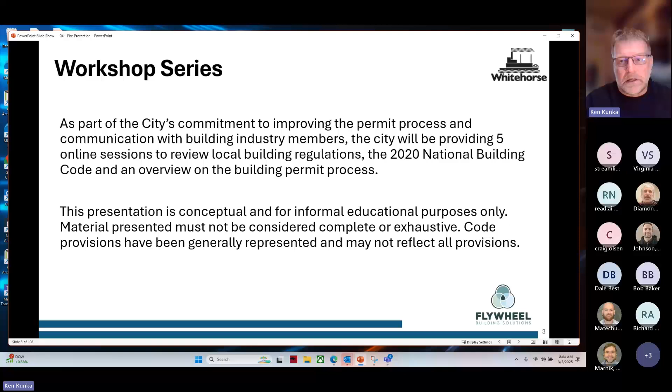The presentation is conceptual. I tried my best to provide some pertinent information to help educate you, especially in this topic of 9.10. There's so much to cover. We could probably do 3 sessions alone in 9.10. But I'm just trying to touch on a few items. And if you do notice an error or have a question, then please let me know, and I can do some more research with the team and follow up with an updated slide deck.

So again, we're on 4 of 5. I'll be covering framing, including the permanent wood foundations, on Friday. And the hope is that these all lead into building out a guide of residential or Part 9 construction. So what needs to be on permit drawings, what type of inspections, trying to give the city's commitment, again, to provide a general outline of the do's and don'ts, so the whole process moves a lot easier.

This session, I'm going to do the best I can to touch on some general overview of 9.10. Again, it's quite large. So we're going to go over the principles of fire, some occupancy classifications, building size, fire separations, and smoke tight barriers. That's really important. The difference with firewalls. We're going to jump into probably a quick session on spatial separations, because again, that can get quite involved in itself, probably its own 90-minute session.

Really wanted to talk about fire blocking, fire department access, and some of the challenges with infill development that every city is facing right now with the increase of demand of low density and some small commercial. And just a quick touch on interior finish, mostly in the cabinets and in the kitchens.

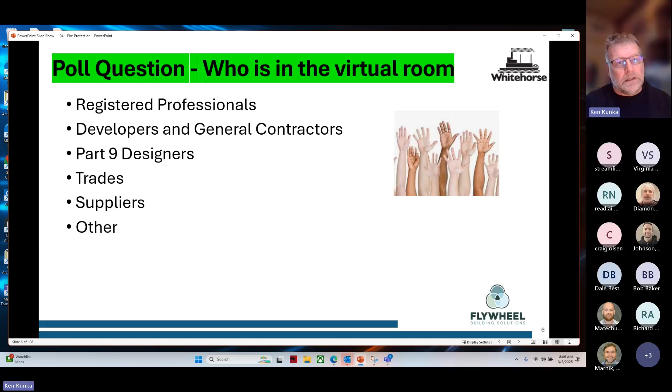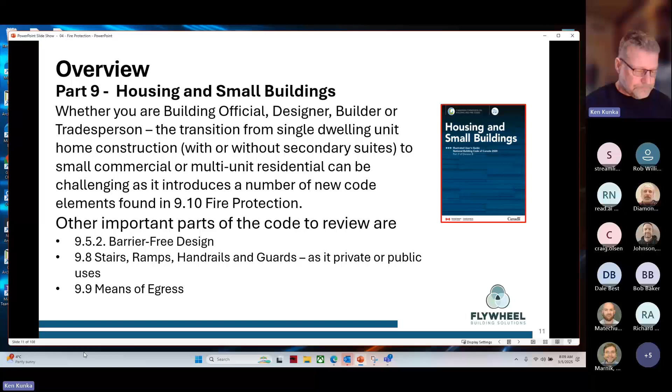Overview of housing and small buildings. So we're looking at the application part in the code, 1.3.3.3. And this is where Part 9 is settled in. So we have Part 9, we have Part 3, and they're based on the size and height of the building, but also some uses. I'd highly recommend that you go into the definition section of the code, especially in this area. If you're in Part 9, doing a commercial tenant alteration or a small townhouse or even a strip mall, this is where you're going to be living.

When you look at an example of the definition, residential occupancy means the use of a building or part thereof by persons for whom sleeping accommodations are provided, but who are not harbored for the purpose of receiving care or treatment and are not involuntarily detained. So those exclude the group care homes and the detention facilities. So we're just dealing with living units that have a sleeping unit, and they normally would also include a cooking facility, but it's not necessarily required by the definition.

So we look at 3 storeys or less and a limited building area. I brought in some specific definitions, because this gets challenging. I know you have the frost protection challenge, so your buildings are probably normally sitting quite a bit into the ground. But at times, on a sloping site, you may start running into difficulties where you're designing a larger multi-unit building, and you want to do 3 storeys and have a basement, and it may have a parking garage on the bottom.

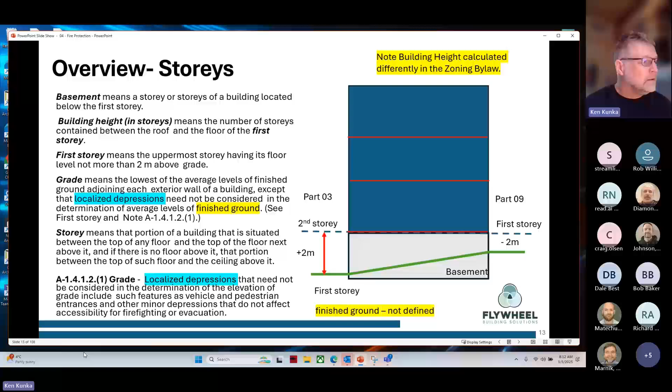On this diagram, you see that on the right side we're less than 2 meters, and on the back side with the sloping lot we're over 2. So really we've moved from a 3-storey building to a 4-storey building, and it kicks us out of Part 9. You do have some exceptions for localized depressions, so a driveway, a door well, a deep window well or door patio. It really depends. But when you start introducing those wells, you also have to think about what we talked about in the last few sessions, particularly foundations. You've got frost protection issues to deal with there. Like I said, finished ground is not defined.

Building area: sometimes this is problematic because somebody will draw or lay out a building, and then they'll have a cantilever, and they'll forget that the building area is actually the horizontal plane when you're looking down at it, not just the main floor. So if you do have a plan view and elevation here, it has to run out to the full horizontal width and depth of that building size.

There are some exceptions though, if you have included a firewall, and that's why firewalls are kind of used within the industry to start breaking up buildings, because then it creates, and we'll go over this a lot, fire compartments. So you have one building, one fire compartment, but if it's a little bit bigger than 600 meters squared, then you can start chopping it up. There's other items that go along with it, and ultimately, how big is this building going to be? You just can't keep chopping it up with firewalls. But we will talk about that later on in slide 54.

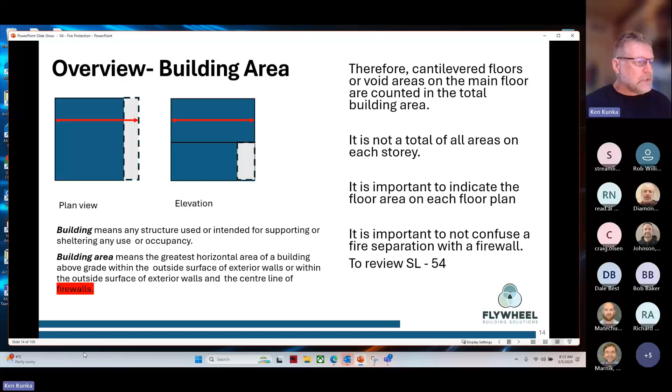I have a lot of slides, so I'll keep going here. I did get some comments from staff over the last week. Been going back and forth. I've been tweaking some slides. So these are some of the ones I've kind of rolled up.

Fire blocking for residential buildings. Know the difference between fire blocking and fire stopping. That's really important, especially as a supplier. So if we do have a supplier or somebody who knows somebody who's supplying building equipment or building products, it's really important to understand what you're selling your builders and homeowners.

And this and the item with duplex party walls in the pipeline, it seems like there's a number of those in Whitehorse. You have a different type of legislation. So I've heard about some townhouse challenges and how that title is registered at occupancy or after occupancy, and it does create some problems when you go through the design and building process because you're not really conforming until some of that's in. Probably Richard could explain it a lot better, but if we have time, we'll deal with that at the end, or I'll talk to Richard and the team and just update the slide deck to explain it a little bit more, because it's different for me; when we register lots, it's just set up a lot different down here in BC.

The fire protection section of the NBC, small buildings, including houses, is founded on principles intended to establish provisions that provide a reasonable level of life safety and property protection. So not only the property, the building itself, but other properties adjacent to it. It's also important for the occupants of the premises and the safety of firefighters and emergency responders engaged in the emergency operations. So I used to always say, well, get the people out and don't worry about it if it burns down. And I've had personal experience. I watched my own house burn down as a kid, so I'm a bit sensitive in this area.

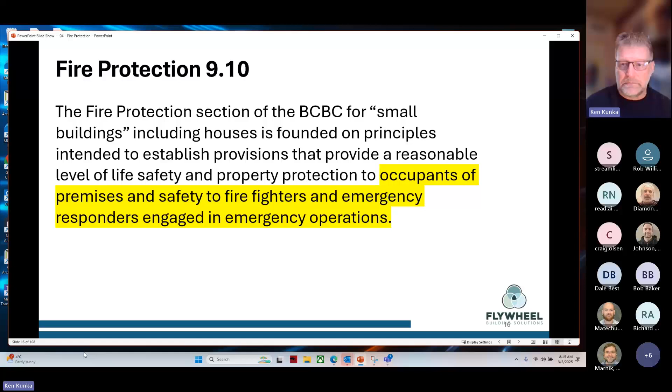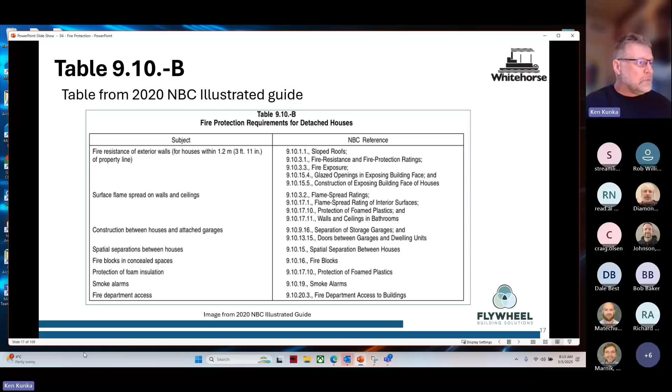This is from the table. I thought it was really great, so I included it here. And as I go along, I'm going to try to acknowledge where I'm getting some of these images from, I hope, for copyright purposes. But I just wanted to highlight where some of these are coming from, so you can go in there and have a really close look at the illustrated guide. But this is a really great one, especially if you're designing a building, and you want to develop your floor plans, your permit sets, and really think through, have I covered everything pertaining to 9.10. So this is a really great one here.

Some basic principles of fire. So how fire spreads: it's either through convection, radiation, or conduction. So in most cases, when we have a house fire or a building fire, an internal one, convection is probably the most prominent one, and I'll go over that a little bit. Then we have radiation. With radiation, now we're talking about spatial separation, and spatial is a building at property lines or a building adjacent to another building. And there's certain parameters of how many openings and how close they are and your wall constructions.

So that's your radiation, because that heat is radiating out. And then conduction. Conduction kind of comes into play where you have a pipe penetration through a fire separation. If there's a fire and that fire is quite intense, it'll create enough heat in a metal pipe to transfer and actually create a problem on the other side of that fire separation. So a lot of fire stopping elements, we won't get a chance to talk about it too much, but it's an FT rating. So the F, and then the temperature, the T. So that's some of the conduction items there.

We also want to think about how fire is initiated and how it really grows. If anybody has watched the movie Backdraft, you can see it's almost like a living organism. It feeds on oxygen, it feeds on wood or some other building product and moves its way. It wants to go from a high concentration to a lower. So unfortunately, if we're not doing the job we want in creating fire compartments and dealing with penetrations in fire compartments or concealed spaces, we can go from the lower level, without a lot of knowledge of it, actually moving into the attic space.

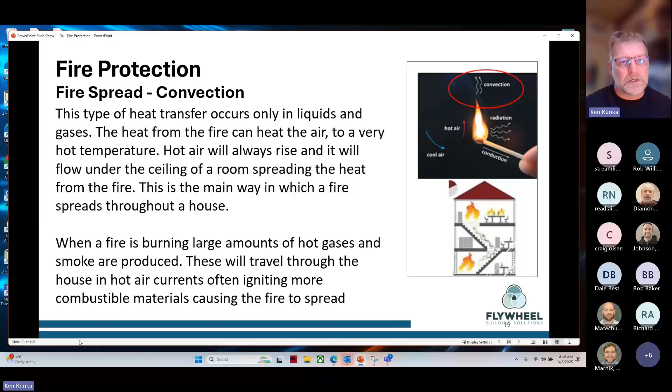And if you wonder why smoke alarms matter, and about the intensity of heat and smoke, you can probably Google smoke alarm flashover. A fire can grow so intensely in smoke and heat. It takes about 70 to 90 seconds for something like a couch fire to go from smoldering to flame. At 79 seconds, it's in an intense situation where the whole room is filled up with heat and smoke. So from this diagram, you can see how quickly it moves. And smoke is the killer in most cases, especially in house fires.

Fire safety systems. Fire safety features in this section we broadly divide into 6 principal categories. This again is from the illustrated guide. Protecting the structural elements, so there's a number of code subsections in there. Dividing the building into fire compartments, again very key for controlling the fire. Controlling the rate of fire spread within a compartment, so materials. Controlling the spread of fire from one building to another, so that's our spatial separation. Providing an early warning of fire through alarms, so we have smoke alarms, fire detectors, and fire alarm systems, and we'll touch on a little bit of that. Providing access to the building for firefighters, one of the last ones we'll talk about.

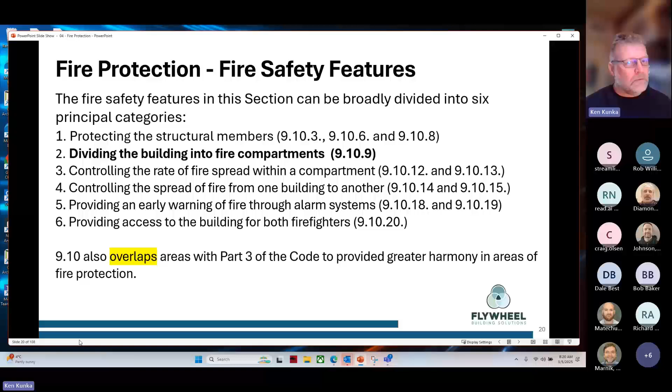And the way Part 9 has been evolving, more so probably in the BC code, the last round of BC codes, the harmonization, it's really good now that we're getting a good fundamental learning of basic principles of fire, controlling fire and creating separations. And it's kind of hand in hand now with Part 3. So if you do eventually jump into Part 3, especially for code officials, it makes it a lot easier understanding the language. I wish Part 9 was just laid out like Part 3, and I'll touch on some of that as we go along.

Well, I mentioned compartmentation. Compartmentation is the practice of dividing a building into fire compartments, either to confine fires to their areas of origin or to prevent them from reaching areas that must be kept tenable in a fire emergency. So I mentioned that, yeah, there's a fire and people get out, but then somebody has to deal with that fire.

And again, you're not necessarily saving the building, but you are protecting other buildings around it. You could be needing extra time to get extraction of people. So it's just twofold on many accounts.

I won't go into too much detail here, but I do try to throw in, again, definitions that I feel are important. So you should understand what a fire compartment is. A fire separation having a required fire resistance rating. So there's two specific terminologies to understand there. So we have a fire resistance rating, and that's a product that's been timed, or assembly that's been timed, to resist the movement of that heat and fire, withstand the passage of flame and the transmission of heat.

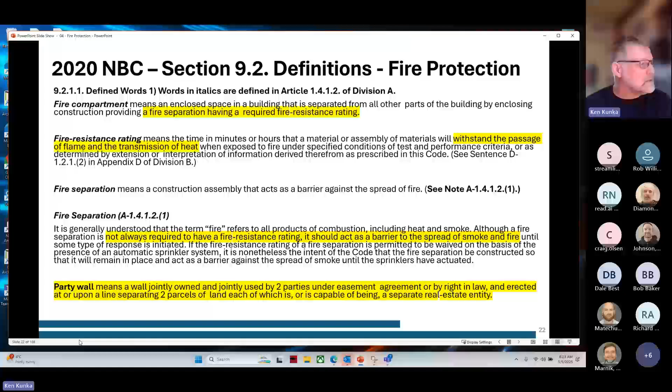And party wall, because this is really important. So talking to Richard and the team, and when I was up there in December, kind of seeing what's going on there and the challenges you have with the title and just the wording and how that's processed, it means a wall jointly owned and jointly used by two parties under easement agreement or by right in law, and erected at or upon a line separating two parcels of land. So that property line there. So we'll touch on that as well.

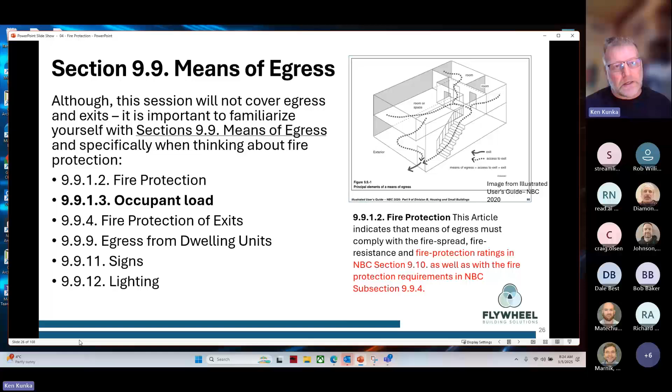And looking at 9.9.1.2 fire protection, it clearly states that means of egress must comply with the flame spread, fire resistance rating, and fire protection ratings. So again, that's why I want to touch on it, because they're kind of hand in hand when you're trying to get people out of the building. Occupant loads, as mentioned here at 9.9.1.3, just understand occupant loads. Really, this table is from the code, 3.1.17.1.

And for this presentation, and in most cases, you'd probably be working in a residential section. We're dealing with occupant loads. And when you're dealing with residential units, it's 2 persons per sleeping room in a dwelling unit. So you add up all the bedrooms or what could be a bedroom. And that's sometimes a debate between you and the building department.

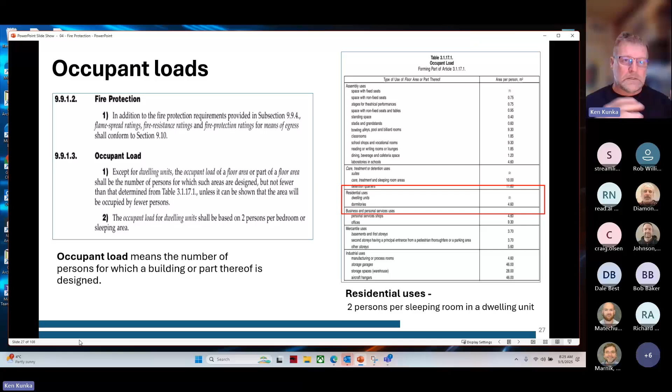It gets into more of a situation where you've got a larger building or, quote unquote, a care type facility where you have a number of people, and then those occupant loads start triggering into the size or the dimension of egress and exits, fire alarm systems, sprinkler systems, those type of things. So I just wanted to touch on that.

Integrated protection of life safety systems. What I wanted to highlight here, and there's some really good commentary in the appendix note, is that when you have a building that starts introducing life safety components, you may have a couple of different professionals involved at that level of the building type. And you have a number of tradespeople that could be installing doors, and then those doors connect to the fire alarm system. So you have a lot of moving parts.

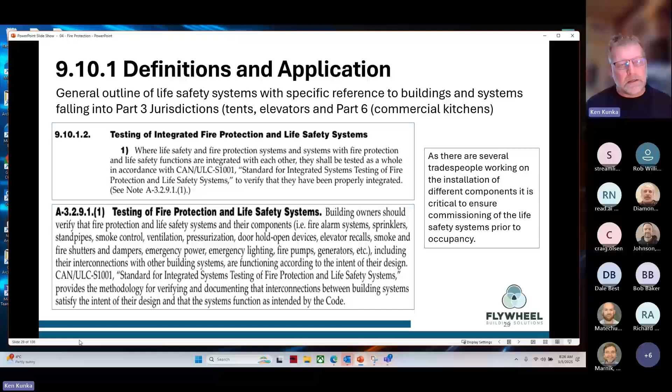They really wanted to emphasize, and this came into code a number of cycles ago, that you need to have this coordinated. You need to have it properly verified. And it's always a struggle of who's verifying. And I know that's probably a struggle up in Whitehorse, of whether there are professionals capable of testing this out, or certified people to make sure that all the work that's done in life safety systems is coordinated, commissioned, and going to work if something does go wrong.

You're probably very well aware of the home type care occupancies, but I just wanted to highlight this. There's a really great video. I mentioned the CBHCC, the Canadian Board of Harmonized Construction. They have a really good video on this. I think it's a great idea. It allows for some flexibility for lower scale housing for seniors. And there are 2 exceptions for sprinklers, so I highlighted those on the side. So we're dealing with 1-story buildings and 2-story buildings.

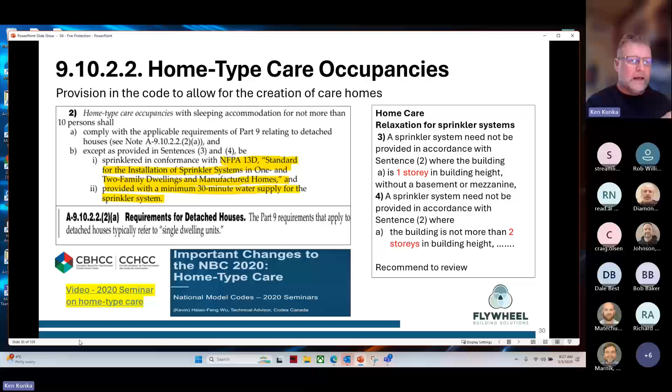I didn't want to spend time going too deep, but I just wanted to highlight again that there is this. There's a great need for it, obviously. So there's an opportunity. It's reserved in the BC Building Code. But I think it's something definitely to look at, and understand where the fire department stands in these matters, because dealing with senior persons, you don't know their cognitive abilities, their physical abilities, and sometimes when you see people in assisted living, they're almost at a stage where they should be in a care home, but there is no space in a care home, and that becomes really problematic.

Major occupancy above a major occupancy. So we're just dealing with a major occupancy. We could have retail, we could have office, so that's a group D, or residential group C. And this clause says when you have multiple major occupancies on top of each other, you have to take the worst case scenario when you're looking at the rest of the code in some aspects. And I have another slide that kind of blocks that out.

Fire resistance rating and fire protection rating. I just wanted to touch on fire protection because we haven't talked about that yet. Fire protection rating means the time in minutes or hours that a closure will withstand the passage of flame when exposed to fire under specified conditions. And a closure, you can probably imagine, is a door.

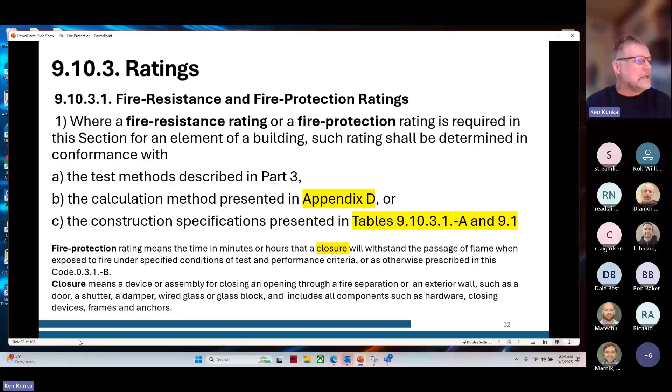But I do want to touch on these next two, the calculation methods presented in Appendix D, and construction specifications presented in the tables. I won't go into the calculations, but I wanted to outline what Appendix D is and what you can use out of it, and what sometimes code officials use, especially in existing situations where you don't know what that assembly is totally made of, but you do know some of the components, or membrane, a sealing membrane.

And in the code here, it gives you some time assigned to certain products. So we have some wood products. We have 12.7 and 15.9, so 5/8 type X gypsum wallboard. And it really depends if it's load bearing or not load bearing. That becomes a big factor. And I think it's even more important when you're dealing with steel studding. And then time assigned again to gypsum wallboard here.

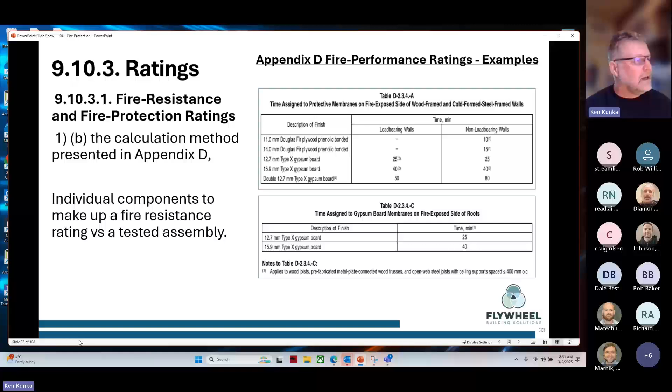If you look at the two tables, it's time assigned to protective membranes of wood frame and cold-formed steel framed walls. So that's the top table. And then we have the fire exposed side of roofs. You probably look at that as ceilings as well. Roofs are different because they're typically not load bearing in the common sense of carrying occupant loads. But you could have that situation. You have to make sure you're looking at the right table, whether it's a wall or a roof. You can't pick the highest one and use that, transposing it incorrectly.

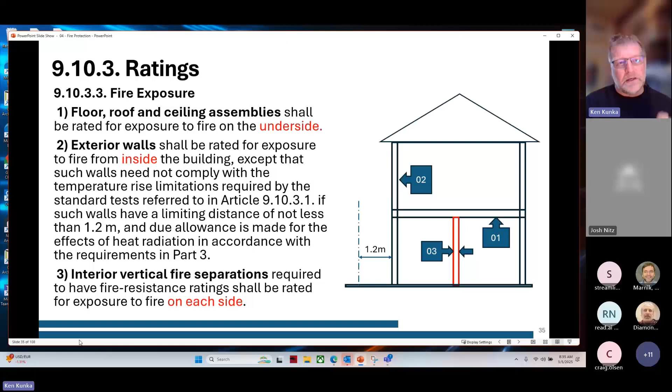So that's something you need to talk with your building official about if you're doing a tenant alteration and there's a unit that's occupied and now you're changing the fire separation from 45 minutes to an hour to 2 hours. It becomes really problematic, especially coffee shops and those types of things where you may trigger an assembly use, which again might kick it into something totally different.

I cut and pasted this part on the mezzanine, so you can see here you can have a cool loft type mezzanine, and typically it's not a big issue because it's 1 or 2 stories, and this is just relating to when you don't require a mezzanine to be considered a story. So maybe by building height, which could trigger other things within the code. It might even kick it out of Part 9. It could kick in exiting routes, fire separation.

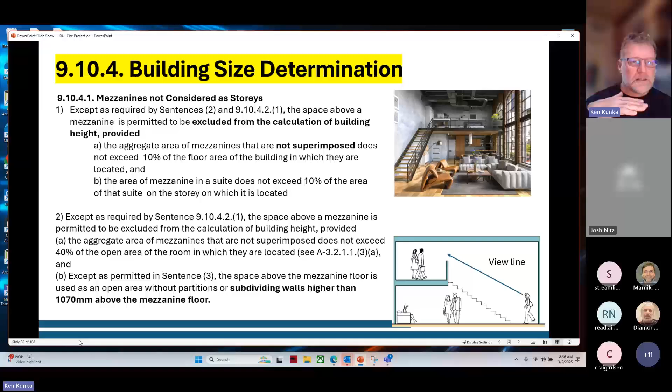Subdividing walls higher than 1070 millimeters or 42 inches above the mezzanine floor. So in this case, you can have it open, and there's a next slide where I'll talk about enclosed areas. You want to be able to visually see up there if there is smoke, because you have a lot of exemptions for this space here. So at least you want somebody to be able to see in there, and that's the reason why. There's also allowance for enclosed areas.

So you have a mezzanine, but then you may have a little office space. So you have a storage workspace in more of an industrial, probably a warehouse type building, but then you can have a little setup here where you have an office space. It can still be considered a mezzanine and get those relaxations, as long as it's not over 10%.

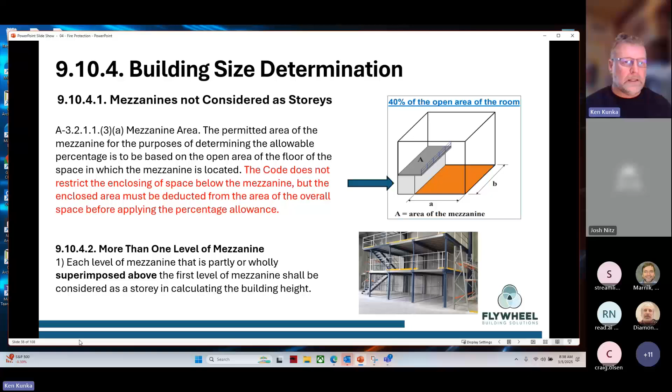So that may again parlay into what size mezzanine you can have above. And there's a couple mentioning about superimposed mezzanines. So this is an example of an industrial use where typically you'd get that exemption, but if you're stacking them, you don't get those exemptions anymore.

There's some really interesting wording in the code itself, when you really start looking at different sections and where they're highlighting certain elements. And this one I just wanted to highlight. So we got permitted openings in wall or ceiling membranes. Pierced by openings into the assembly unless the assembly has been tested for such. I don't think a lot of assemblies are, other than maybe a ULC, very product specific, very specific use in a building type situation.

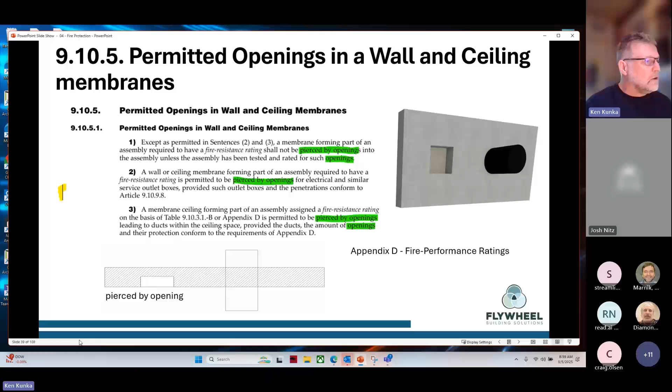Fire resistance rating and combustibility in relation to occupancy, height, and supported elements. So remember a few slides ago, we talked about when you have major occupancies stacked on top of each other, you're taking the worst case scenario. In Part 3, when you're talking about the construction of the building, you have to look at a multi-storey building. So if I have a Group E, a Group D, and a Group C scenario on a small, probably maxed-out Part 9 building, that Group C may have a couple of units in it, the Group D may have a couple units, and the Group E may have one or two down there.

Obviously the building can only be 3 storeys, can only be 600 square meters in building area. And here everything is 45 minutes. When you get into Part 3, it gets way more problematic. And that's just the construction element part, the fire resistance rating of the floors and roofs. And we'll talk about fire separations in a few more slides.

But I just wanted to remind you that we kind of defined it. Now we're looking at this for all the occupancies. So if you go to Group E and it's classified as a Group E major occupancy of 3 storeys, should we also consider that roof now in that element? I'm going to do a little more research on that one and follow up with the updated slide deck.

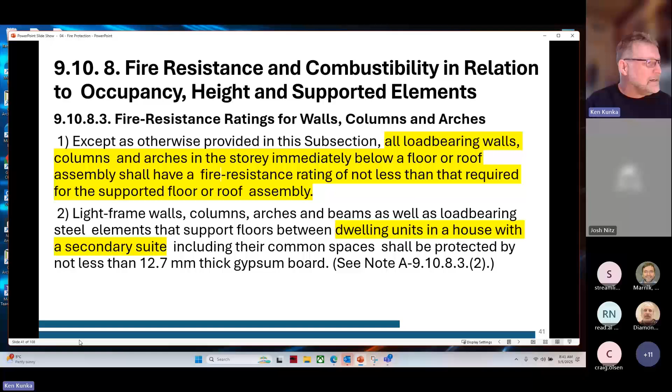This is something that got altered in BC. They kind of said, we don't worry about it anyway. Well, that doesn't make any sense, does it? To have the floor rated, but then not have the supports rated. So that was a good catch in the harmonizing process.

Application to houses. So we can look at Table 9.10.8.1. It does not apply to a dwelling unit that has no other dwelling unit above. So we obviously wouldn't worry about first floor, second floor, third floor in a house, or basement to first floor. There isn't a fire separation. I didn't put it in the slide, but there seems to be an urban myth that a garage for a house has to have a fire separation from the rest of the house. It doesn't. I wouldn't even say it's a smoke barrier. It's a fumes barrier.

And then you have your door into the house with the self-closer. So I didn't have a slide on it, but this is my mic. It does come up from time to time. Houses with a secondary suite where the floor framing is protected on the undersides. Again, we went over that. And a dwelling unit that is not above another, below another major occupancy on those.

I think the fire separation stuff comes from the ICC. Yeah. In North America, a lot of codes talk to each other. They have code developers. So the NRC talks a lot with the ICC, the International Code Council, if I'm reading that acronym right. There's also a number of other codes used in the states. Each state may have their own code association, but ICC is the biggest one here. So we went on that one.

Application. So I just wanted, again, a reminder. So the application, the subsection applies to fire separation between rooms and spaces in the building and smoke type barriers required in houses with a secondary suite. So they've made that distinction there. And then now we're getting into the part of continuous barriers because this is really important containment, not of fire, but more so smoke. And again, smoke is probably the major killer, especially in low density and high density housing.

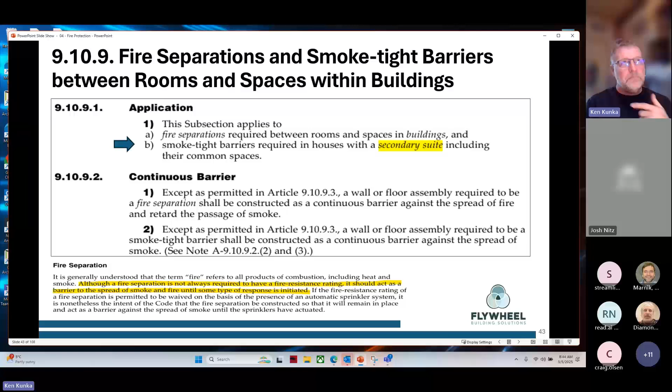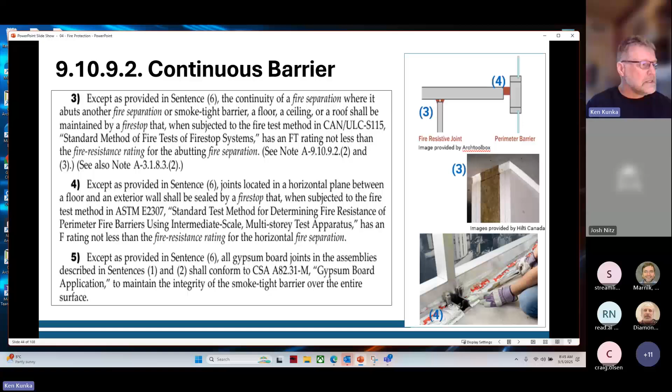And then 6, the last one here, joints between ceilings and walls and floors. So they have inherently said that in a wood frame construction and you're nailing the drywall assembly, it's tight. And even if the building moves and shrinks a bit, that joint will stay together. So there isn't any particular issue with fire stopping when you have verticals and horizontals coming together at fire separations because everything's going to hold up pretty good.

The only problem is if you do have resilient channels, you're moving that drywall membrane away from the wall, and you may have a gap in there. So that could be problematic, and either fire stop or really think through your detailing and how you're building those out. Because in the appendix, fire stops need to be installed between the joints of interior finish materials. So you want to ensure you're always creating that smoke barrier. And if you're moving that drywall, it says it's okay because we're going to nail it to the wood element. But now you're moving that away from there.

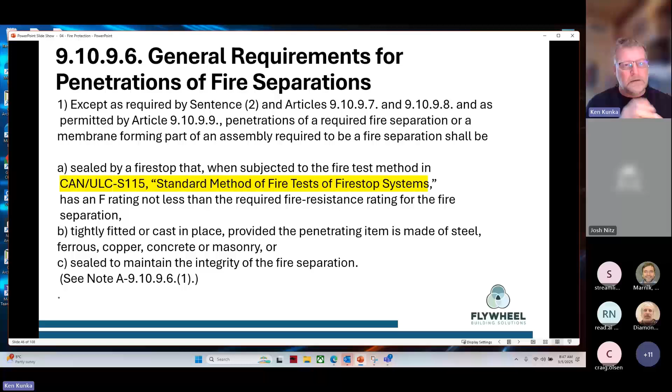And you have to be very careful because, again, if a product like Hilti says you need to use this and this to achieve the fire stopping in this assembly with this penetration, you can't start deviating and buying this product and that product or slightly modifying how it's put together. It's really important because it's been tested for that type of assembly.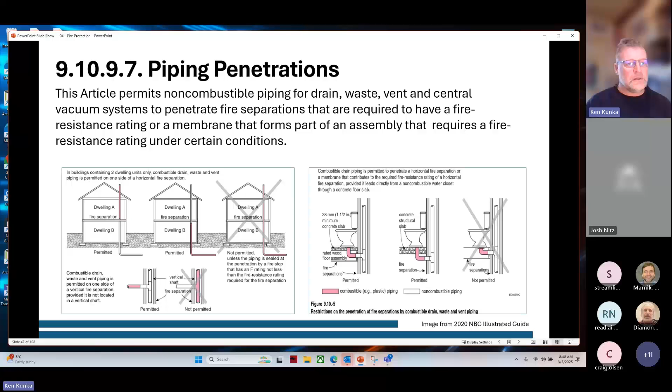I just want to touch on, and again, image from the illustrated guide, piping penetration. Plastic piping is a bit more of a problem in a fire situation than non-combustible. Over the years, they've allowed more and more combustible piping. They even have fire-rated plastic piping, more so in the large buildings. But here, it's a good diagram of when you don't need to fire stop and when you do need to fire stop. So I can't get too much into detail of that, but I would read it, and this is a really great diagram for that.

I did want to provide this as a reminder, and Richard is saying they have been looking at this. This is something brand new in the NBC as part of the harmonization. You have a lot of outlet boxes, and you have to pay particular attention to these penetrations. Outlet boxes are permitted to penetrate a membrane of an assembly, except for sentences 2 and 3, and we'll go through some of those. But this is really if you have this requirement and this is the type of assembly, this is the type of fire stopping product you'd use on it, and it specifically tells you how to wrap it and how to set it up. So that's one way of looking at fire stopping.

There is an exception, and you have to be very careful on non-combustible versus combustible boxes because it does outline it a little bit. So here it says, except for 9.10.9.6.2, non-combustible outlet boxes that penetrate a fire separation or membrane forming part of an assembly, so that have pierced the membrane of that fire assembly, required to have a fire-resistance rating need not conform with sentence 1, provided they do not exceed, and again, it's hard to convert metrics in your head.

So I've put on the bottom of that little diagram 25 square inches, and an aggregate area of 100 square inches of total boxes within 100 square feet, a 10 by 10 wall assembly. So you can see, even on the left side there, they have a triple or quadruple gang box. So it may not get that exemption, and that has to get fire stopped. And the annular space in a non-combustible box does not exceed 3 millimeters, which is pretty small; 3 millimeters is loosely the thickness of a toonie.

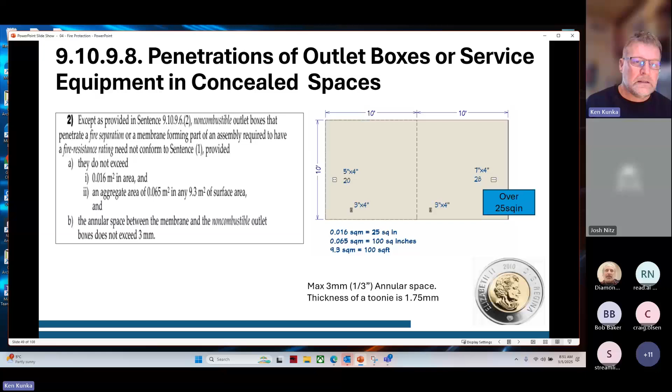Except as provided, so this is sentence 3 in that same article. And except as provided in sentence 9.10.9.6.(2), combustible outlet boxes that penetrate fire. So, again, they allow some allowances. And again, for time, I don't have a lot, so I drew a little diagram. I was trying to figure it out, trying to do a secondary suite presentation here in BC. You can create these little boxes within the box to control it.

There's some other parameters in it. And you kind of think about this as a fire blocking scenario we'll go over. And then you have these penetrations. You also have to make these penetrations for a pipe or a wire that goes through this.

Sorry, let's grab a glass of water.

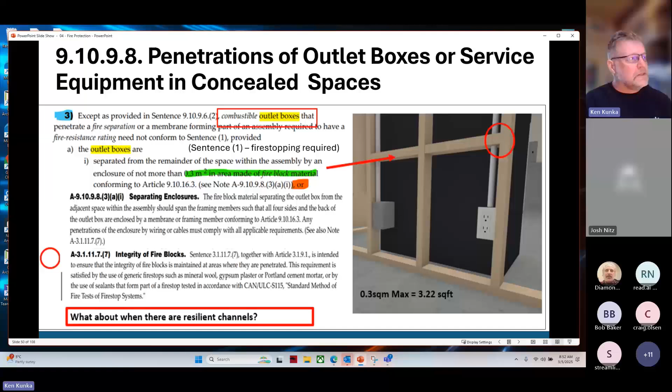You do have to look at the integrity of the fire blocks, and that's that last sentence there with the circle. If you start poking holes in there, you also might hit resilient channels on that wall if it's a rated tested assembly, it may have furring on it. So you have to take care of that too. So you can see there's combustible and non-combustible boxes, and there's different ways of trying to go around that. Non-combustible outlet boxes, there's some spacing allowances.

So I did a little diagram, the best of my abilities, to try to figure out, like, you got back to back. You never want to put back to back, but the code, and that was more of probably a lot older code. This is way more specified in where and spacings of it. So it's really good that it's in here. So you should be knowledgeable of it. The designer should actually put some details in there. If you have multi-unit fire separation, put a note about penetration. So then the people on site should know and should follow that. And the building officials shouldn't have any issues when they go on site.

Separation of residential occupancies. So I just highlighted a few in here. We're talking about major occupancy. So we talked about what is a major occupancy, and defining what that building is when you're kind of stacking units one on top of each other. We talked about the minimum construction or fire resistance rating requirements of a multi-unit building. This one's now talking about suites. So separating these uses more definitively.

And we're talking about major occupancies here, and we're talking about a residential occupancy, but you could have other occupancies, obviously. And like in sentence two, if we had a two-story group E underneath a group C, you'd actually have a different fire separation. And again, we're talking about fire separations in here. So okay, we got sentence one: except as provided in sentence two, residential occupancy shall be separated from all other major occupancies by a fire separation having a fire resistance rating. So we're combining those two. So we go into sentence two.

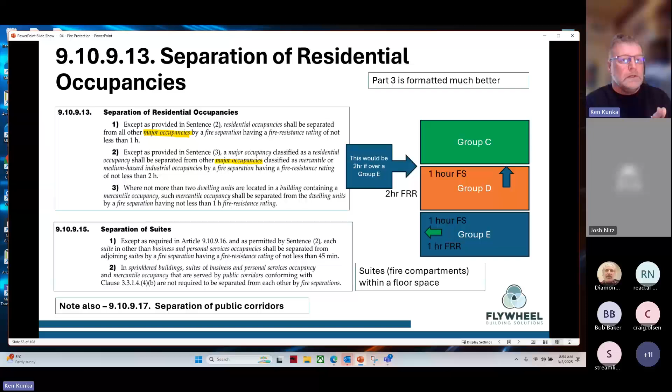And we're looking at suites. So again, suites within a floor area. So you could have offices, or other types of uses separating. You could have residential units, multi on one floor area. So that section here, I can't get into too much detail, but it'd be great if the suite bulletin was done up. And I know that's probably one of the projects that the Whitehorse team is working on, just for consistency, or just pulling stuff out of the code, but also providing. And we'll hopefully have a little bit of this in the guide when we talk about setting up suites in homes. But I just wanted to highlight here that separation of residential units, it's typically 45 minutes.

If we have 2 or more stories, so that's sentence three, I'm just going to jump to sentence three here. So you have a duplex or a townhouse setup, and it's more than 1 story, you're looking at 45 minutes to 1 hour for your vertical fire separation. That vertical separation has to go all the way through. There are some exceptions to that, but in most cases for low density housing, you're going all the way to the other side of the roof sheathing there.

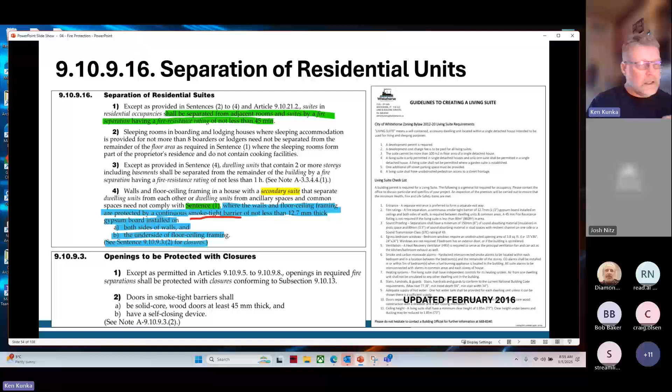And then when we throw in sentence four, it's secondary suites. And again, those relaxations that you wouldn't see in some other codes there. And openings protected. So I just wanted to make sure, and the team had noted that, again, both sides of the walls, gypsum wall board, the underside of the flooring, ceiling framing. So your floor assemblies have to be done and set up properly. And then you're looking at closers. And again, that closer, it can't be a hollow core door. It has to be at least a solid core door.

And this is an interesting detail I found from Whitehorse, because they are also under the national code. So I just wanted to throw that in there with the link, so you should be able to look at that. And one very excellent guide, a very large guide, you can still find online and download. The only problem is it is starting to get a little outdated, but the basic principles are the same for fire stopping and fire blocking. So I'd highly recommend it if you get a chance.

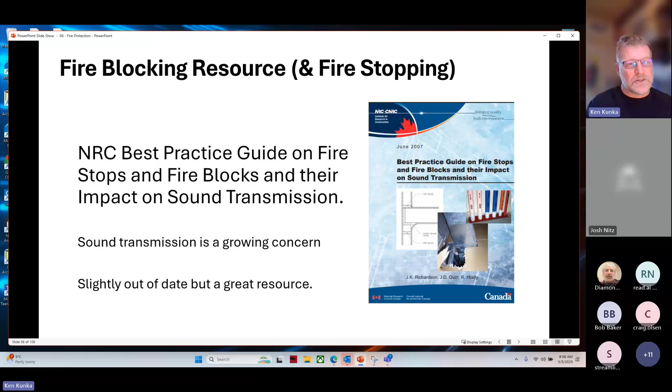I'm gonna ask for questions, but I'm not gonna take a break, because I still have a bunch to go through. And if you have any questions, I'm going to try to answer as we go, or if I can't, definitely have been looking at these and either building out some more explanatory in a slide deck, but I'm just going to keep going here.

Firewalls, you know, a little bit different in Whitehorse than probably here. We normally wouldn't see this anymore. The scenarios where you have property lines, and then you have a townhouse unit. And I honestly don't know enough. I'm gonna have to learn a little bit more and talk with the team on this. But I just want to say firewalls are not required. So typically a firewall is a fire separation that is non-combustible construction and has a fire resistance rating of at least 2 hours. And there's a little description on the bottom, and that's from a defined part of the code.

You know, but there's an exception. So a party wall on a property line of a building of a residential house need not be constructed as a firewall, provided it's constructed as a fire separation not having less than 1 hour fire resistance rating. So fire separation, fire resistance rating. The two dwelling units where there is no dwelling unit above another. So here we have 4 townhouses. So we could typically probably get away with maybe 1 and 2 being a 1 hour fire separation, and then 3 and 4. But we have more than 2. And even in here with the star on it, the building contains more than 2 houses.

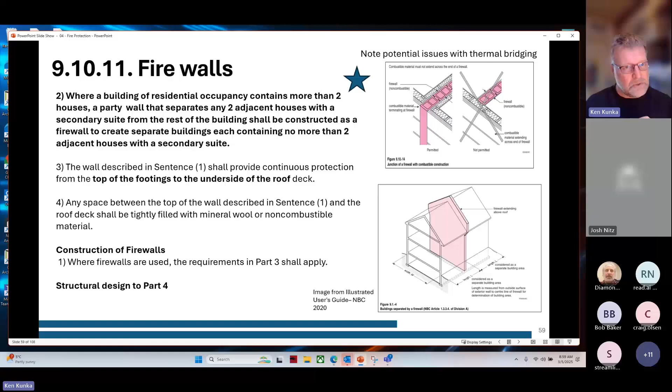You can see here with firewalls, again, it's a very robust system, and part 3 outlines it in detail. The rating requirements based on occupancy types. It typically would extend through the roof, so there's quite a distinctive breakage in it. You can see on the detail on top, you don't butt it into a building envelope or the exterior wall. It has to go through. There are probably some complications with thermal bridging, so you can see how different the details are between one or the other on there. And then your firewall is a part 4 component. It has to stand on its own, whether it's 1, 2, 3, or more stories. So it requires a structural engineer involved in there. This is a placeholder, but prevention of fire spread, exterior walls in between buildings.

So we are going to talk about spatial in a little bit here, but you can see that even in a building in itself, you could expose one fire compartment to another if you're not being careful with your design and where you're putting your windows.

So on the left there, there's a magic degree point of 135 on it. If you go more than that, you're moving from parallel to now going on an angle. There's some limitations on how close those openings can be, and even the material, the wall construction of it.

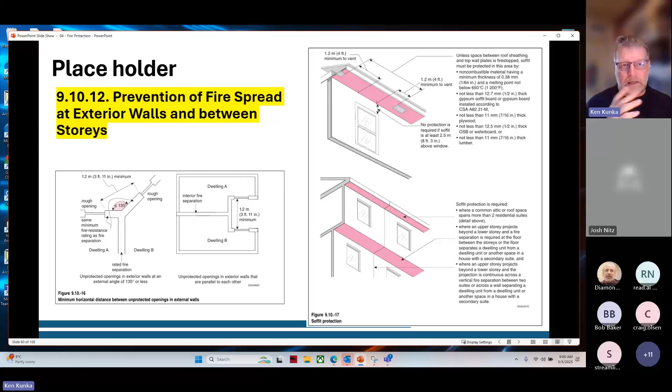And then soffits are a huge problem. I'll touch on that in fire blocking, but soffits are a big problem. Once the fire gets from the building into the roof, it's a total wash. So I just want to touch on that.

Doors and dampers: the purpose of closures is to hinder the passage of fire. So we talk about protected closures, and this is where this element is. All devices that close off openings through a fire separation are referred to as closures. These must be tested and rated. Ratings for closures, however, are referred to as fire protection ratings versus a fire resistance rating.

So obviously we have doors, and doors have to have closers, and we don't want to have them wedged open. We can have hold-open devices that are hooked up to a fire alarm system, so when the fire alarm system goes off, the door closes. But we can have other types of closures on the right side.

You have wired glass in a fixed steel frame, glass block, fire dampers, and fire flaps. That picture is from the guide. It's a fire damper. Fire dampers you have to be able to access, so they have to have an access panel so you can get in there for maintenance or other reasons.

But on closures, you can see for a door, they're not like for like. So if you have 45 minutes, it's 20 minutes. If you have 2 hours, it's 1.5. If you have 4 hours, it's 3. So there's a little bit of a difference there to pay attention to. I'd probably say most standard steel doors and frames come at 3 hours, but they're labeled differently depending on their usage and at a different price point.

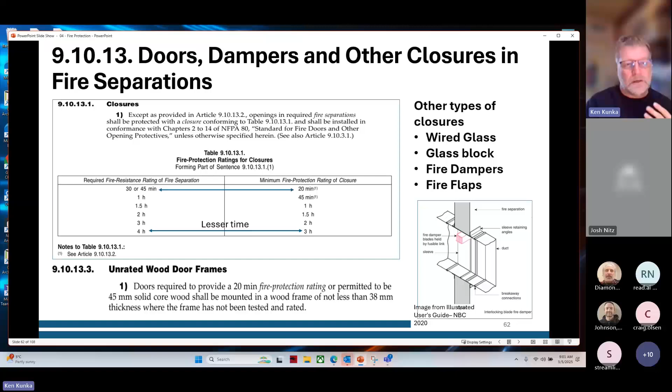But when we look at unrated wood doors, again perhaps looking at our suite situation, doors required to provide a 20-minute rating are permitted to be 45-millimetre solid wood core doors. So again, no hollow doors in a secondary suite situation. It has to be a solid wood door and at least get this rating here.

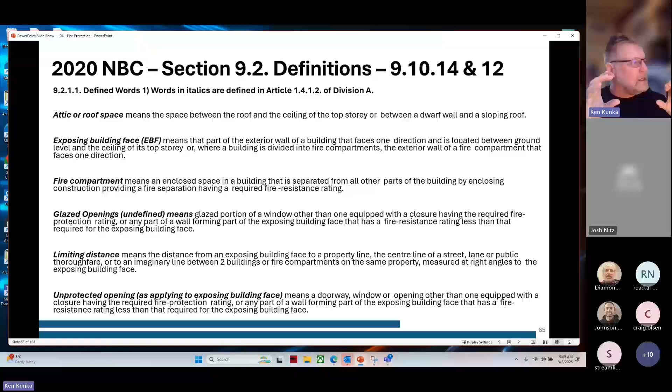So you have your exposing building face, and then you have openings in it, or you have glazed units in it. And there's a certain percentage based on where you are to the property line. That's what that diagram shows. So like all these, you have to study your site plan, your floor plan and your elevations. You have to take that into account as you're going through.

And if you start changing stuff, or particularly it starts changing on site for interior separations, particularly when you're getting pretty close to the property lines, that could really make a problem at time of frame inspection if you don't talk to your building official.

So do that. So 14 and 15: spatial separation between buildings, and then spatial separation between houses. This applies to buildings other than those in 9.10.15, so houses, and it does not apply to detached carports. So that's been kind of taken out. And there's a little bit of an explanation on that, and it talks about when is a carport a garage versus something else.

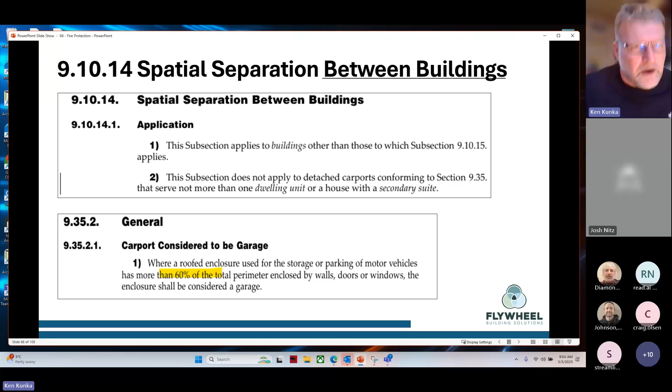We have limiting distance and fire response time. So again, being very mindful of your fire response time and being able for the truck and the crew to get to the site and out and set up. And there's some time limits to that, exposing building face. And there's some particular limits in there.

And then typically when you get to Sentence C in 9.10.14.4, where a limiting distance is not less than 1.2 meters, you can start using different methods of calculations. And that gets limiting distance squared. You can use part 3. So I'm just going to regroup here.

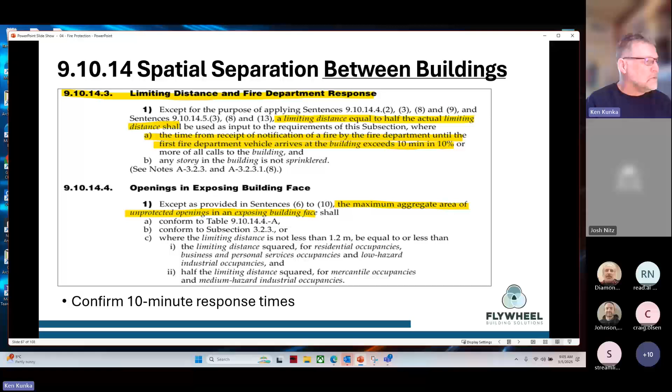So on openings and exposing building faces, you can use a table, which is in the code, and it gives you percentages based on the wall areas. You can go to part 3, or, if you're not less than 1.2 meters, you can use this really quick squared method. I'd recommend using the tables for consistency, but as long as you're showing the calculations of how you achieve that in the drawings, there shouldn't be a problem. And the reason is you can kind of get the best of those in those situations. But again, confirm your 10-minute response time in those areas.

So now we're in houses. So buildings that contain only dwelling units, no dwelling unit above. Again, if you have a stacked duplex, that's in 14, not 15. If you have side-by-side townhouses, that's in 15 when you have the side lot setbacks. And it also includes houses with secondary suites. And it digs into more of the application of the section. And I just highlighted this again.

We're looking at traditional detached houses, semi-detached, and they can have a secondary suite, row houses and stacked dwelling units, but only a secondary suite would have stacked dwelling units, basement and floor above, but not a stacked duplex or 2 separate units. You couldn't use that. Provided party wall and property line. Oh yeah, and I just want to touch on firewalls too. I'll probably clean that up because I do talk about firewalls.

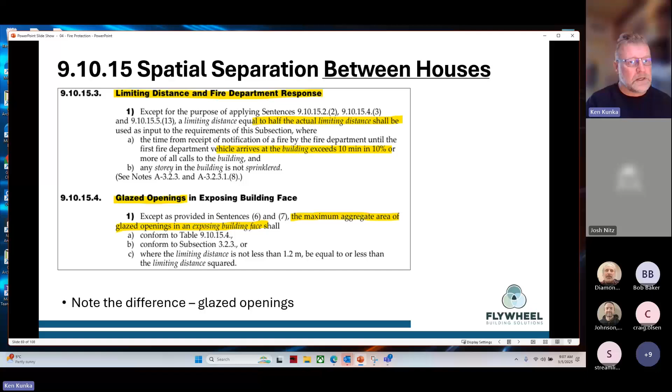Limiting distance, again, the same thing as in 14. Exposing building face: again, you can use a couple different methods as long as you show it. I tend to stick with the tables, but you may find your own way around that. And note the difference is glazed opening, so you may not include a door now, a man door from a garage. While you're in 9.10.14, you'd have to take that into consideration because it is an unprotected opening. That's the rated door with the closer and those type of things on it.

Just wanted to highlight here again for time's sake your limiting distance, so you're looking at site plan. You're trying to maximize your building envelope probably, for return on investment. So you're probably closer than 1.2 meters, and I'm not going to really touch on that, but that's another potential concern here, or having soffits close to the property line if you get closer and closer. But you can see here from this chart from the illustrated guide that once you get to 1.2 and then you get in, it really changes the game.

And it also changes when you're talking about 9.10.14 versus 9.10.15. So you really want to pay attention to, one, your limiting distance. You want to talk about your unprotected opening or glazing percentage that you're allowed. And that really relates, you can see on the right side of that table, maximum area of glazed openings. So in 9.10.15, it's saying you can't have any openings. And then when you look at the last row of that table, it says now we're at limiting distance greater than or equal to 1.20 meters.

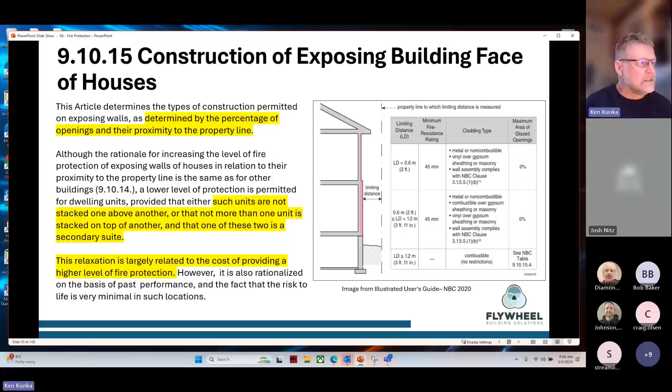So when I was talking about a garage, a garage, in Canadian code, does not have to be fire separated from the principal dwelling. So it's almost like taking that garage and pulling it away from the building. You're saying that wall from the garage to your house doesn't have those same requirements you would if you had two buildings. If these are two separate buildings, and in this case, if you converted that accessory building into, I think you call it a garden suite or accessory dwelling unit, then all that comes into play.

Now you have spatial issues playing, but you still have to look at the part that's facing the property lines. You still need to deal with those spatially, but not necessarily the accessory building to the house component, unless it's converted to a different type, even a home occupation, an office. Now you have a group D to a group C, and you no longer get that accessory building exemption.

Team wanted me just to remind everybody, they had a couple projects come in a part of town that has a lot of duplexes. They have a masonry party wall. You see that a lot. It doesn't necessarily need to be that because we went over some of those exemptions, but maybe back in the day that was just the way it was. But the property line runs through the building, and then you have these additions that are put on. One's more than 1.2 meters from the property line, the other one's closer.

So you're really going to run into some problems because that spatial requirement goes to that property line. You're not going to have any openings less than 1.2 meters, and that wall construction has to be dealt with. And then you may have some openings, as I talked about, when you're less than the 135 degrees. You may have some exposure issues too, and wall construction issues. So you really have to think this through when you have this property line sitting through, because it is taken from the property line.

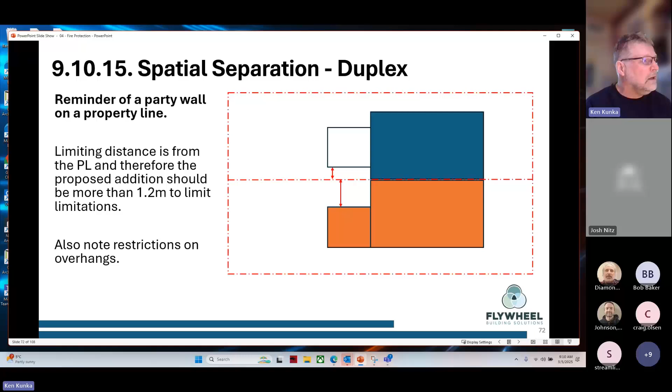Fire blocking. I'll spend about 10 minutes on this one and then have a few more slides to close up. Just going to grab a drink of water.

This is, again, a Part 9 house scenario, but I've been amazed in my 30 years as a building official working in large and small communities, and even traveling around the province and up in Whitehorse, at the lack of knowledge about fire blocking. A lot of people think fire blocking is only required in multi-unit commercial buildings, and it's not. Back in the day, the codes were broken apart. I think the confusion was fire stopping, but some time ago, fire stopping was broken apart into fire stopping and fire blocking. And I think now that sets the tone, and now we're dealing with Part 9.

Because remember, way back, we talked about these little boxes here, and you want to think about the box and putting holes in boxes, and you want to think about what makes up a fire and how you control a fire from growing and spreading. And you can think of this stud space, and this is taken from Fine Homebuilding. They've done an excellent job of explaining fire blocking. So you can Google it. There's videos. There's really great diagrams. So I thank them for putting this out.

So you have an electrical failure, and it doesn't matter if that box is in that wall or in that stud space. You can still have a fire in that space because you can see there's wires horizontally going through that space. Something happens to that box, or there's a fire outside, a heater, in an older home. Again, you're within a home, so there's no fire stopping or tight fitting outlet box because it's not a fire separation. But that stud space is a fire compartment. It's a compartment within a compartment of the wall, and you want to be able to control that. I think that's what I'm trying to explain there.

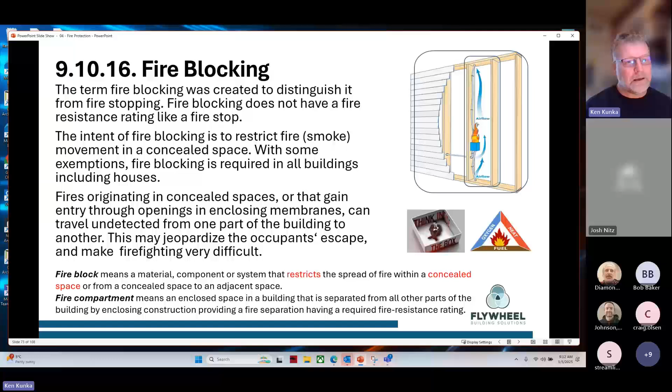And I provided the definition of fire block and a fire compartment, and really know the difference between fire stopping and fire blocking, because there's a huge difference. And that foam spray stuff question I'm going to touch on here. When we talk about framing, way back in the day, and even some newer builds, they may do this, maybe in a high wall situation.

But before it was balloon framing, and you can see here on the right side of that top diagram, a lot of those buildings aren't around because they had a fire, and that fire just raced through the building because on top of that they weren't insulated either. So it moved from one floor to the next through the concealed wall cavity. Platform framing, we've pretty much dealt with that.

I did notice though in the S406-16 standard, they do have, when you do have that raised wood floor assembly, and I'm not sure how many times it happens anymore up there, but that has to be fire blocked. Even though it's an exterior wall and it has insulation in, and I'll explain that in a little bit. But it's not fire stopping. That kind of troubles me when you have a ledger, and you can't do a ledger unless you have proper design.

You may have a ribbon board and that floor joist is actually attached to the framing. That's a Part 9 framing component, but you also have the fire. They call it fire stopping. It's not fire stopping, it's fire blocking. And I wish, again, this standard has been updated a number of times, but some of the little small things are niggly. But you can see that the old style framing and maybe even this permanent wood, you have to take conditions into consideration. Vertical concealed spaces in interior walls.

So Sentence 1 in 9.10.16.1. So concealed spaces, spaces where you can't see inside and something's going wrong. And you can see here from this diagram that you could have a fire, you have smoke, and it just, again, finds its way because it's going to be eating oxygen. It's going to be eating wood. It's a breathing, living organism moving through. So you want to think about those problematic situations where you've dropped down for plumbing, piping, or mechanical, horizontal concealed spaces and attic spaces, roof spaces, ceiling spaces. Again, one going into the other.

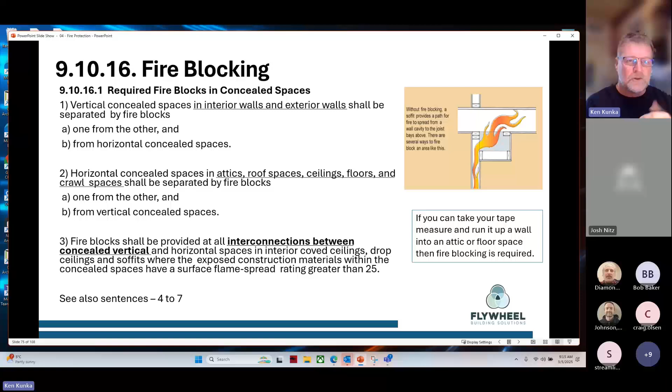Fire blocks shall be provided at interconnections between concealed verticals. And I have a diagram on that. And then it also goes into a number of other sentences, which I don't have time to go over. But the way I learned it as a building official, I was having trouble on some of the clauses and some of the sentences. My mentor said, take your tape, go up to your wall at framing stage, and put your tape up, and you normally hit the top plate. And that's, again, stopping fire and smoke from getting to the next level. But if you have a drop and that tape can now go through the drop into the ceiling space above, now your fire stop is blown, and you have to deal with it in a different manner. That's just a tip.

And again, there's different scenarios, even at tub enclosures. If the penetration through your subfloor for your piping, you have the trap, and there's usually a giant hole in it. Well, what happens is there's a fire in that concealed horizontal space, and then it gets into the wall, and then it's going all over the place. So there may be some work you do as an industry in that part, but I did want to talk about wall assemblies. Except as permitted in Sentence 2, fire blocks described in Sentence 1 are not required provided...

And this is the reason why: fire blocks described in Sentence 1 are not required provided the insulated wall assembly contains not more than a 25 millimeter gap. There's a little bit of a breakage point of a gap, and it's less than an inch. The exposed construction materials within a space are non-combustible, so there's really nothing to burn. So that's one of those elements of fire that we've taken away. The exposed construction materials within a space, including insulation but not including wiring and piping, have a flame spread rating of 25 or less, or the concealed space is filled with insulation.

So in an interior wall, if you fill that space up, usually you can eliminate the need for that. I think there's some debate there. And I'm going to touch on that right after this slide. This is a big problem when you have shared attic spaces, overhangs in a townhouse or duplex. You have to fire block those overhangs.

I don't know how many fires I've actually seen because this wasn't done in older buildings. This is as well as not taping inside the attic spaces for smoke control, or in basements, unfinished basements. But this is a big, big one, like make sure you get this: canopies, roof overhangs. It's really, really important in there.

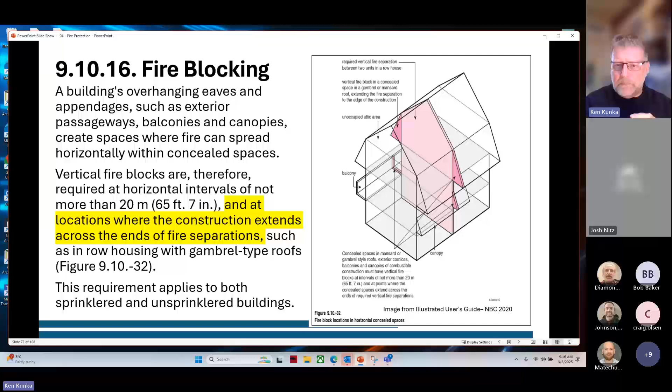I'm gonna follow up on the backing of the baseboard. I'll follow up separately, but I did want to show an interpretation from the BC Building Code. It was actually an appeal, so it's binding to that project. And it's basically saying, I have an exterior wall, it's obviously full of insulation, so I have a drop, so I don't have to, in the position on the right bottom, do the fire blocking.

And for whatever reason, they decided to use 2x6 studs for fire blocking in here, because it's a pain in the butt, obviously, right? And it's maybe a thermal bridge and all these other things. But the Board has decided that that part of the code where you get an exemption on interior type walls doesn't apply to exterior walls. So you still need to do it. However, you could just run that drywall up instead of putting that blocking.

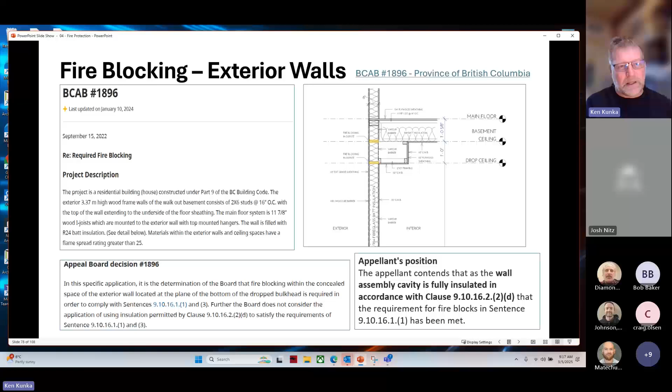So we come to the question about foam. Foam spray is great. Hilti, Tremco, they all have these really great foam sprays for fire stopping, which again can transpose and you can use this as a fire block. But you can't go the other way around, because that stuff here was sold as a fire block and it seems to meet the standard, but it didn't meet the standard of fire stopping.

And our inspectors went inside a building and it required fire stopping, and they saw this orange and they went, "Oh my goodness." They looked at the can. It's not tested as a fire stopping material. It's tested as a fire blocking material. So rip it all out, which was obviously a pain. And why was that supplied to them?

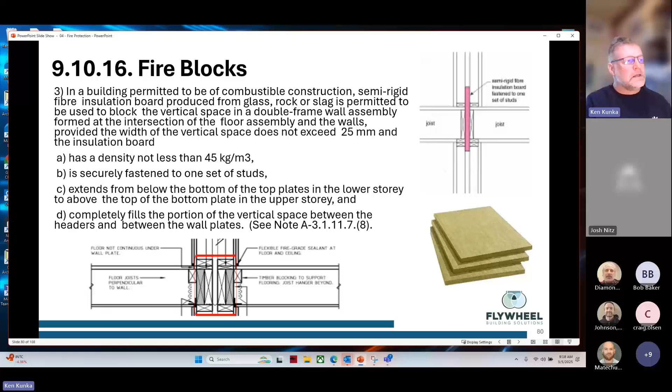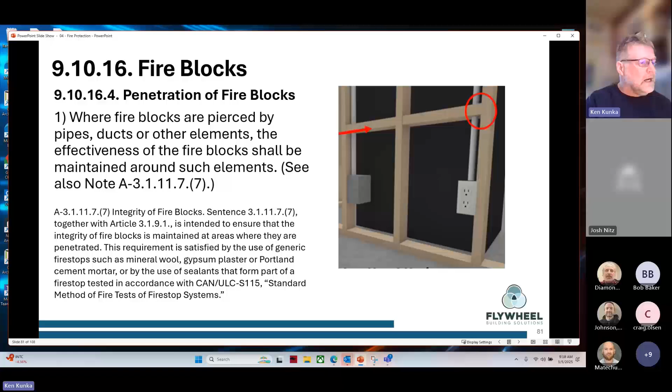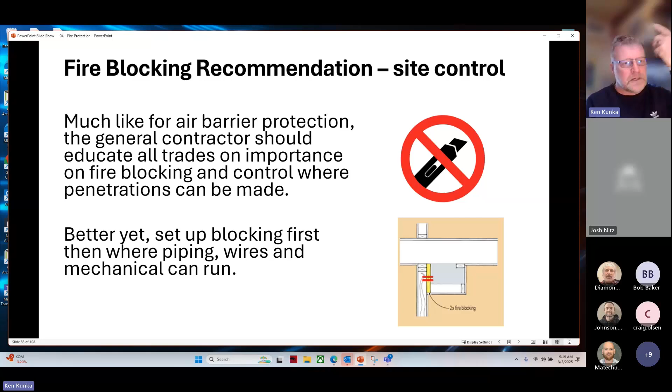I would recommend once you've set up your fire blocking or even a fire separation, don't let people touch it unless they ask you to do it. Better yet, especially for fire blocking, put that blocking in, put the OSB, put the drywall in, strip, and then do your back framing. Or have that mechanical ducting put in there and finish your back framing, whatever you need to do. But look, as a general contractor, you control where those holes go, not vice versa, because it's really hard, especially when you do horizontal and you got multiple things coming through the floor in a chase. It becomes a total disaster at time of frame and insulation inspection.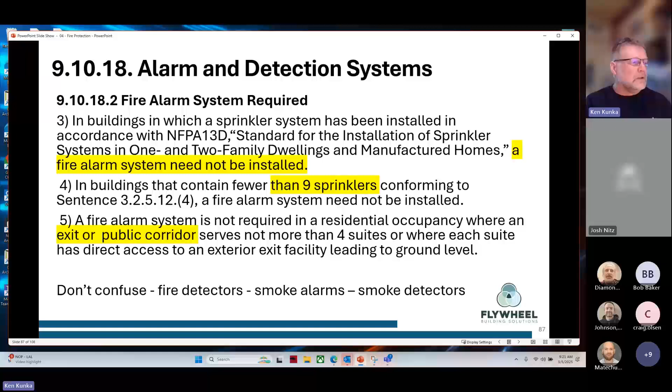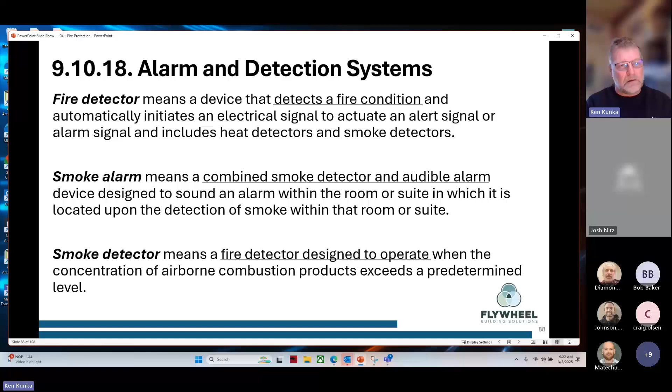Don't confuse fire detectors, smoke alarms, and smoke detectors. And here, just be cognizant, because even drawings have an SD. Well, you don't have an SD in a house; it's a smoke alarm. So be clear on your terminology with your designs and on site with your trades, especially when you start talking about fire alarm systems. You want to know the difference, as they have to be properly installed for the use and then tested and commissioned at the end.

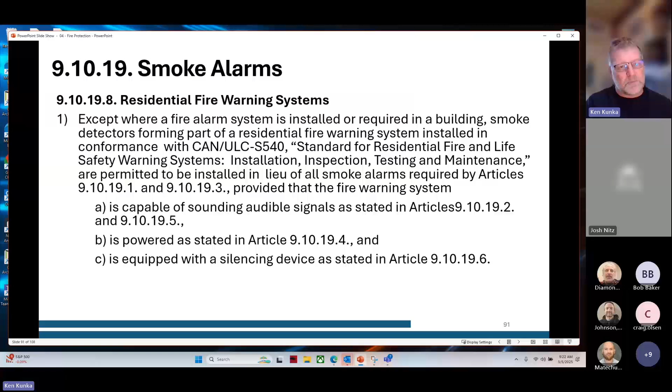I won't touch too much on smoke alarms, but there are some stipulations beyond a residential unit. So I just wanted to remind you; I read this section as a refresher. Residential fire warning systems: again, this is in the smoke alarm section, so read that smoke alarm section for that item. Firefighting is very gray in Part 9.

Part 3, 3.2.5.6, outlines fire department access and access onto the property. Part 9 doesn't, and a lot of communities here in BC are trying to build that up in their building bylaw, because with missing middle or mid-density, low-density housing, where you may have one unit behind another unit on the same property, it becomes really, really problematic. You may have a steep lot where the fire department can drive up to the property but actually can't get to the house because it's so steep or it's in a snowy condition.

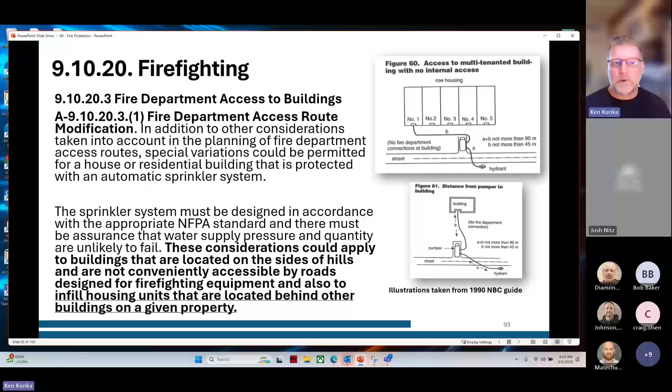So these are the appendix notes, and I found some really older diagrams. When you're thinking of a house, a townhouse, or a commercial building, you have your hydrant. Your hydrant should be shown on your site plan, or a snapshot of where it's located for reference. The truck should hook up to that and run to the front of the property, not necessarily onto the property, but gaining access onto the property. So that's 45 meters. And then they shouldn't have to drag hose more than 45 meters to the principal entrance of those buildings. So again, it could be one principal entrance. It could be a multi-unit commercial, a multi-unit townhouse, or a unit in the back.

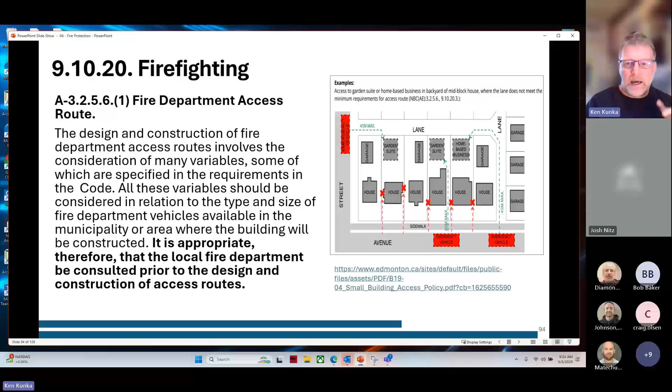So this is where you see, and Edmonton's got a good outline of this, that you have to get to the garden suite in the back. You don't fight fires from the lane traditionally, because those aren't really dependable for snow clearing or what's being parked there. So again, you see in red the emergency vehicle setting up, and they have to be able to go 45 meters from that vehicle safely onto the property. They can have closed gates. They can have all this junk in between, heat pump stuff and recycling bins. You need to get to that garden suite and get to the principal entrance. So you may even have to turn the principal entrance towards the building to get that 45, rather than on the side of the street. And I can go over that more if you have any questions.

So again, this all revolves around the increasing mid to low density push, which is greatly needed, but it's creating some issues not only for fire department access, but also water flow. And that's something I think, as we develop the guide, we're going to get into a little bit more.

I'm meeting with representatives from the planning department to make sure we're on the same line of trying to promote housing, but also making sure the infrastructure and the fire protection is there. Fire protection for gas, propane, and cooktops.

I just want to remind, there are clearance requirements, and I just highlighted a few, cut and paste there. That's a really great diagram in the code. So again, what you're putting around that, whether it's electric, gas, or propane, and there's some allowances where you can go a little bit lower as long as you're protecting it. So in the second part, it shall not be less than 750 millimetres above the level of the cooktop, reduced to 600 millimetres above the level of the elements or burners.

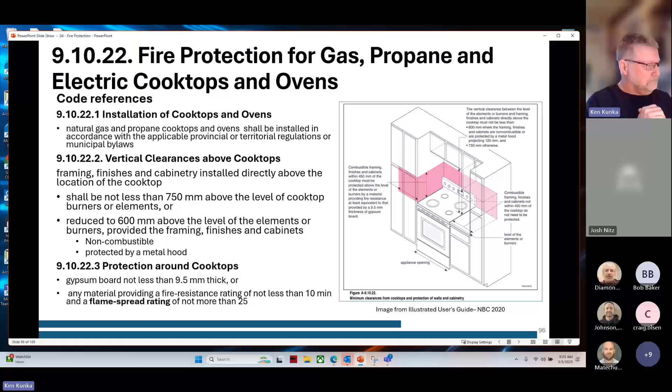We have questions about microwave units going on top, and they have a fan. It's like, does that qualify? I would really read the specifications from the manufacturer of that product to make sure, or talk to your building official around it. And again, how you're protecting it on the sides as well. And that's that last section, protection around cooktops.

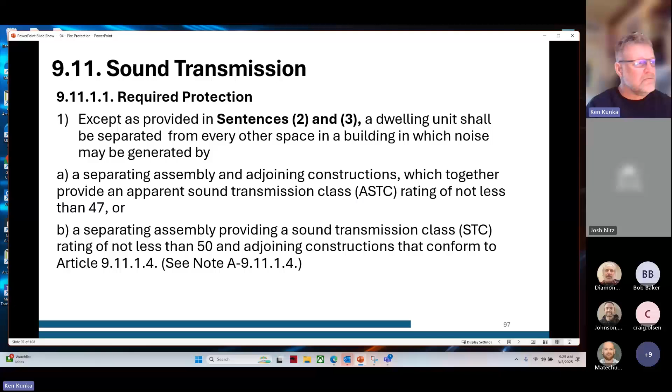Sound transmission: there are sound transmission requirements other than a single family house. So we have suites. They don't have a fire separation. They're a smoke type barrier, but they have sound separation. So be very mindful of that. And again, this is where a house contains a secondary suite, each dwelling unit shall be separated from every other space in which noise may be generated. So it can vibrate through the construction, and through the air, it can move that way there.

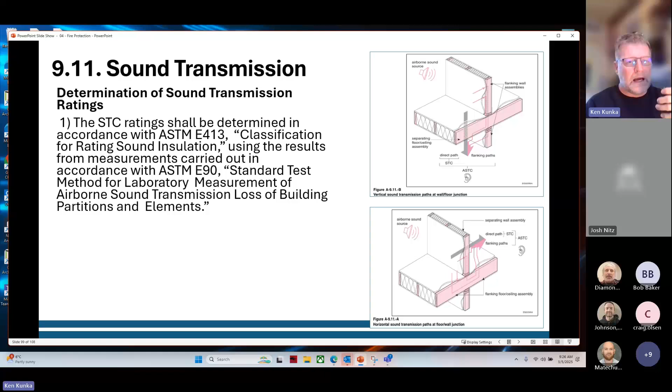And again, it's hard to know, well, how do you know it meets it as a secondary suite? So they prescriptively tried to set this up so at least it meets some minimum standards, and it is a little bit lower than what you'd find in other types of uses. When you get into multi-commercial or multi-residential, it goes up. If you have an elevator in the building, that actually has a separate type of sound separation as well.

So just finishing up, we're really close to the end here. So thanks for hanging in with me.

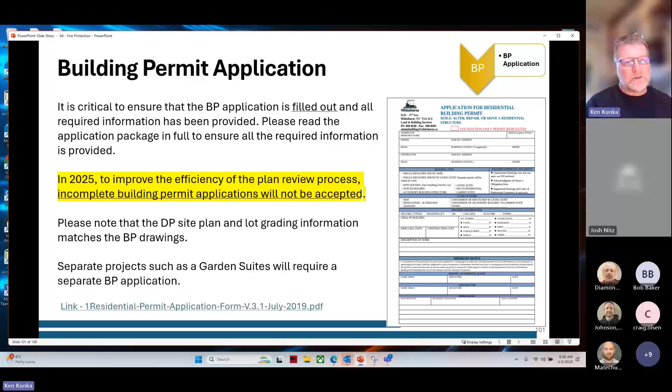We have our applications, so be very mindful of your applications going in. Make sure they're very complete. Don't wait too long to bring them in because we're getting into spring. That means everything's getting busier and busier, and you just want to get those in sooner than later so the team can make sure they're developed.

There's really good information on the application checklist, what to bring in, and I'm just going to highlight that. So when we're talking about, again, I brought in one of the first few slides here, the fire protection requirements for detached houses. Could go for townhouses, a garden suite. Just think about, okay, what do I need to put in a site plan to deal with the fire protection matters? Make sure you've got that in your head. A lot of it's outlined in the bulletin that's there now, and we'll really beef it up in the guide.

Floor plans. Okay, what do I need in a floor plan to show substantial compliance with the code and make sure nothing gets messed up on site? You want to, again, put the fire separations, pull that code, cut and paste that table, that component, that W1C or whatever you want to use, put it on there. Hopefully the builder will build to that and work with the building official.

Elevations, obviously, spatial calculations. You may have some exterior protection issues if you're doing multi-unit, and Part 9, and these sections and details again. Do you have any issues with limiting distance? So you have to make it very clear on floor plans and the sections that this wall is going to be built a little bit differently.

You actually have load-bearing elements holding a fire separation between floors. So you're not using normal drywall. You have to use rated drywall. Even though it's not a fire separation, you still need to, and there's tables and diagrams in the code for Part 9 on walls and floors and exterior walls, and I think some attic spaces as well.

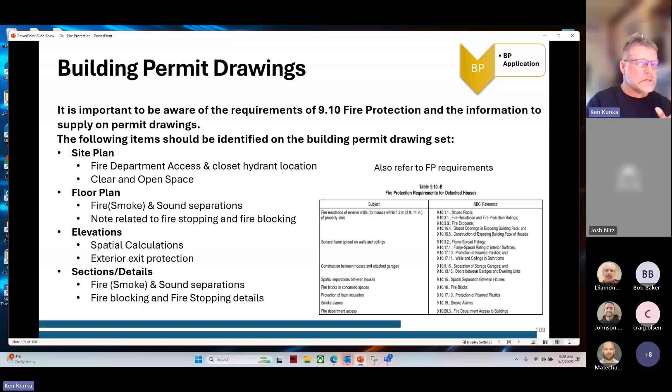At framing inspection, again, they're going to check any previous issues. They're going to review the substantial changes that may have occurred. So hopefully you haven't changed window sizes, particularly on side property lines, that now could mess up your spatial calculations.

Please always, if you're making a change, just let the building officials know before it's too late. So we got verification of spatial calculation, back framing, fire blocking, backing for fire stopping. So you can have large donuts, and those donuts have little prongs on them that have to be screwed into the wall. So I've seen one screw put into the studs and three screws on drywall anchors, and that's not right. So make sure your backing is in for those large penetrations with the more robust fire separations.

Soffit protection, again, making sure it goes through the attic spaces into the overhangs. That's your fire blocking. You can do that at framing or insulation. And sound barrier, again, making sure all those details. And if you're having questions of how this works, especially if you're new to fire separations and fire stopping, start it, do a mock-up, talk it out with the building officials and your site team.

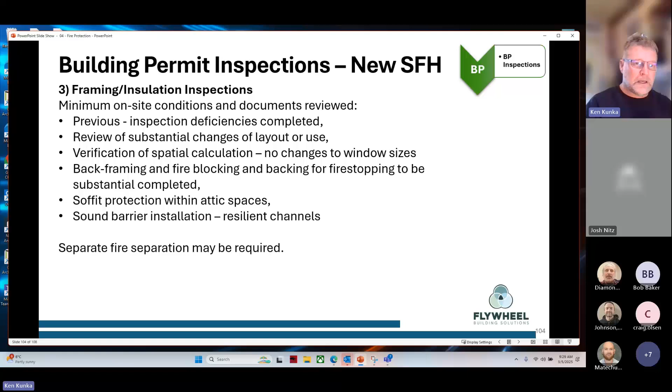And once you figure it out, go with it and try not to make a change and try not to poke holes in it after. Because when we get to occupancy, that's all going to be reviewed again. And I just listed a few things here. Make sure your smoke alarm covers are off and they test. Again, soffit protection, both spatially, where you need it.

If the overhang got too close, and there's a code limit on those, right? Or if you have a really short setback and then you have overhangs, there's some specifications on that soffit material, or if it's over an opening in a multi-unit building. Don't change the script. Stay with the drawings, review if there is a change. Make sure you're ready for inspections as a project manager or general contractor. Make sure you're ready and make sure, again, some of these items were done.

And your fire stopping is, your fire blocking is correct. Your fire stopping is not fire blocking, spray foam. Completion of the firewalls, make sure there's no damage to these kind of separations. And then, your kitchen clearances here. When in doubt, reach out. Again, go online. There's some growing materials online. There's some really great people.

Unfortunately, we've lost Mike Gau, so I'm going to update this. It's really unfortunate. It was passing, but there's a really great team, and they pulled together, and they're moving ahead, continuing to make changes. Reach out.

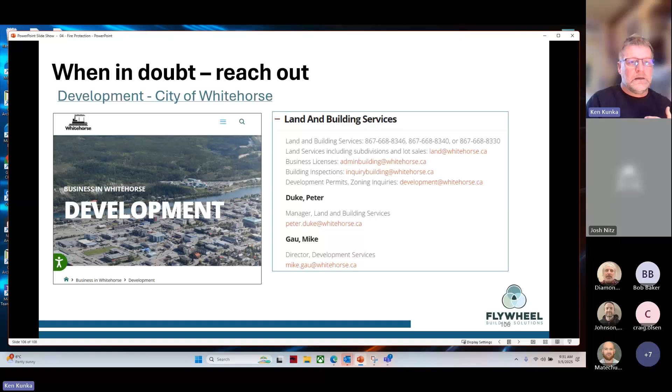If changes are being made from their permit issued drawings, let your teammates know, both on site and at the building department, and work some things out.